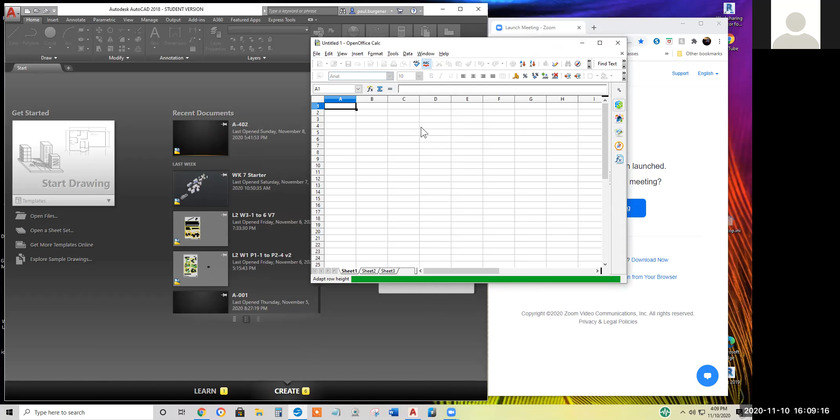I can't understand what you're asking. Can you hear me? Yes, I can hear you. I don't have the complete final project.

Can I send you the birdhouse during this week? Something about this week. I don't know if you're too close to your microphone, maybe.

Okay, I didn't assign anything week 7 or 8. Is there a way you can text me? I'm at a loss on why I can hear you, but it's kind of garbled.

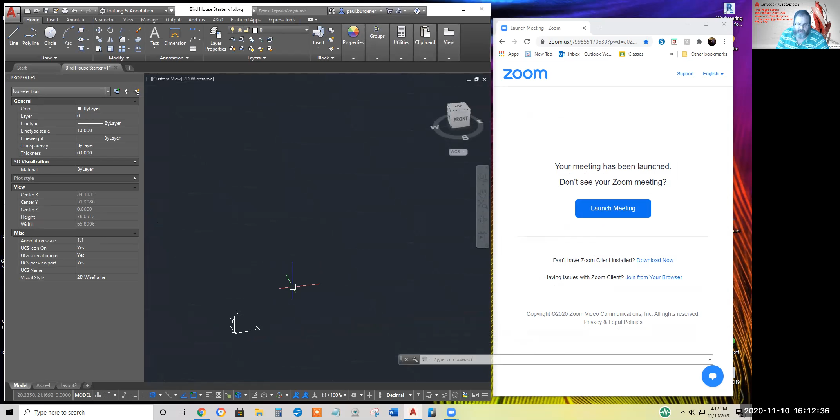Monday the certificates will go out, so you got until like Saturday midnight to get me the birdhouse.

Let's see, where's the birdhouse rules? Where am I? Oh, okay, here's the birdhouse rules. I added note number 2 for the next time I use this in intermediate.

It's tempting to have a V notch in the top instead of a nice tight seam in the top. But that's a funnel for water to collect and drip into the birdhouse. So I'd like you to seal it either this way or overlapping.

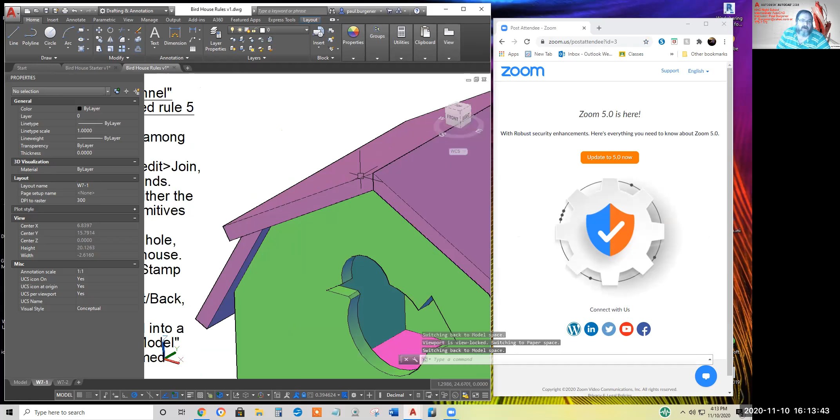And I suppose this board could extend all the way out to here, and that would fit the bill. That would provide a glued tight seal that water couldn't penetrate. But the rest, the other 15 rules, still apply to this class.

Let me double check I'm recording. I see a stop video. AutoCAD class 2020, Zoom recording. And today is the 10th, so this folder... never noticed meeting saved chat before. Anyway, it looks like it started recording at 4:08.

Ah, thank you. Okay, I didn't realize there was a text file here. How do I reply? Yes. I don't know if she got that text or not. I don't see a reply button.

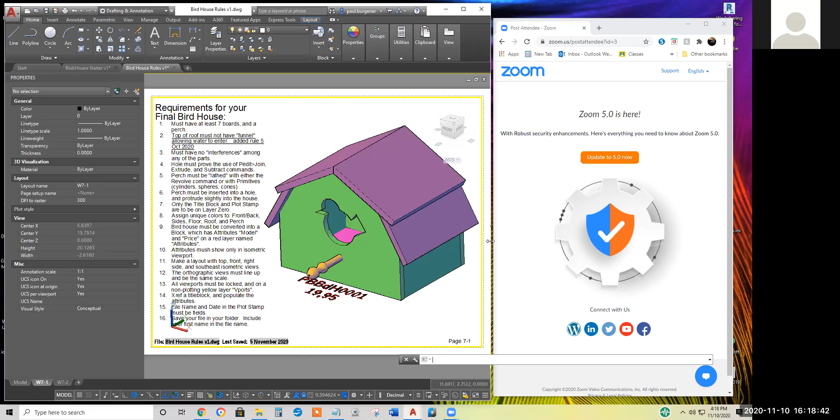And so the one that comes up on my version of AutoCAD has circles as one of the options, text inside of a circle. They have the text inside of a hexagon too, but so I took the circle one and copied that block and modified it to have an oval, and it worked pretty good.

And I added the attributes like you taught us, because I wanted to also say in front of that oval in the text, reference 15, and then it's really piece number umpty-ump in the oval. So it worked out great.

I learned something in this class.

Well, what about the leaders? Were they attached to the block, or did you make a separate block of the leaders that you could attach and stretch, scale anywhere? Go ahead, understand the leader part of the functionality in the tool palette there. They had the original one and I just modified it. I'm not sure how to attach the leaders to a block, but they already had it. Like I said, I just modified the existing one. Does that make sense?

Sort of. I don't know how they attached the leader, but the leader was part of the entity that I had copied and modified. When you modified the circular block, could you remove the leader or put it on the other side and save it to a new name? Or I tried to do the block separately. I tried to just make my own block, but then I didn't have the leader. So then I said, well right, I have that leader, and so I just modified what was existing.

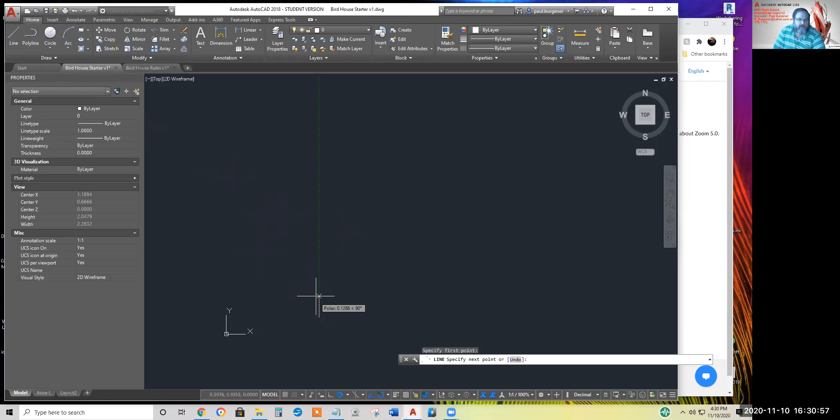Anyway, how fancy should I make the front? Damien, I think, had the walls taper out. So does that look like a good half of the front if I mirror that over? Yeah, kind of a pentagon-ish looking thing. So there, we'll call that the front.

We'll put the fancy cutout. What would be a cute cutout? Maybe a heart. Let's see, arc. MI for mirror. What happened? Oh, I'm still in arc. MI for mirror.

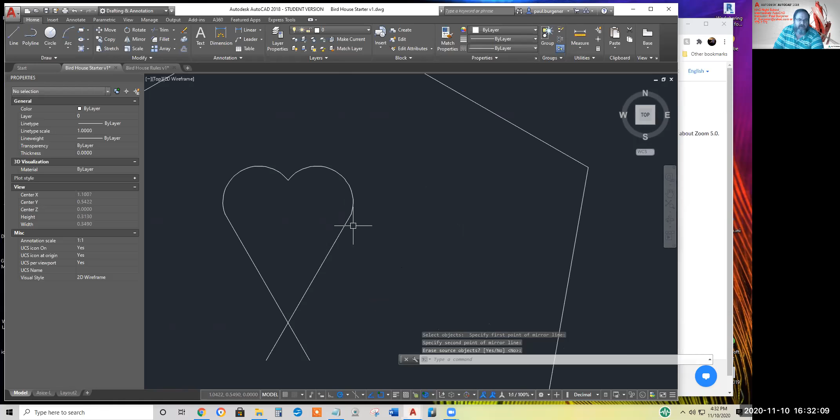MI for mirror again. A little bit of a jag there, but don't tell anybody. And TR for trim.

Is that too big? Maybe scale it down so the squirrels can't reach through. Scale it maybe to 3/4. Better center it while I'm thinking of it.

M for move. And eventually we want a hole for a perch, so maybe I'll use NEA or snap to put the perch maybe right there, and we'll make it say, let's see, radius, maybe make it a diameter. Yeah, what the heck, a diameter of say 0.5 unit.

Hello. What happened? Oh, I'm an idiot. I forgot, I should have been typing dimensions.

How big do we want this bottom to be here? Say 10 inches, 8 inches. Let's make it say 8 inches.

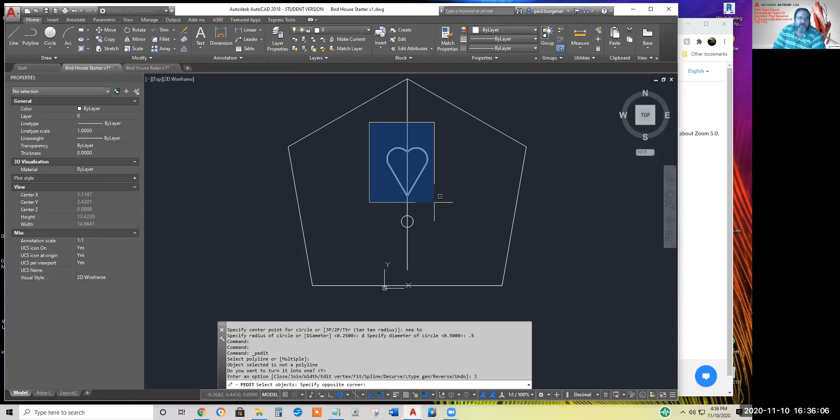And we'll select the rest of the heart. And I believe that's, yep, that's successfully welded into a closed polyline.

Do the same process for the perimeter of the front. We'll change that line. Yes, I want to convert it into one. Join, select everything. Up. Why is it not closed?

All right, I just clicked close and it's unusual. I thought I snapped end to end to end. Let's check out the width, see if anything strange happened. Oh, that's what happened. It came up here to the T intersection and went down and back up the vertical line. Always something. All right, we will hit escape or enter.

We'll explode this odd polyline and select and hit E for erase. Don't forget AutoCAD, you can select stuff and then invoke the modify command. It's probably better to invoke the command and then select the objects, but we'll erase the vertical line.

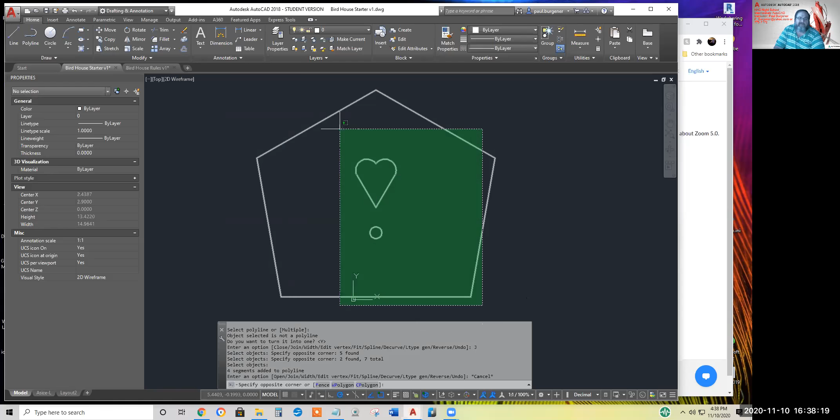Okay, we'll put everything. Who's coming aboard now? Anna's joining us. Okay.

I can always do it another time, but while I'm thinking of it, I'll move everything we got here to the front, or the front back layer, so it'll be green colored.

I believe I can extrude all 1, 2, 3 of these closed polylines, well, the circle and 2 closed polylines at the same time. I've been using 1/2 inch plywood, but there's not a requirement for thickness of the board. So let's go switch over to the 3D modeling workspace, launch the extrude command.

We'll select everything we got here and extrude it to, say, 0.5. Now, unfortunately, I didn't set the layer current, so I'll have to fix that. Enter.

Because I was on the 0 layer when I extruded, the new stuff is on the 0 layer. So, always something, ain't it?

We'll move it to the front back layer. And where's the layers? I'll set current.

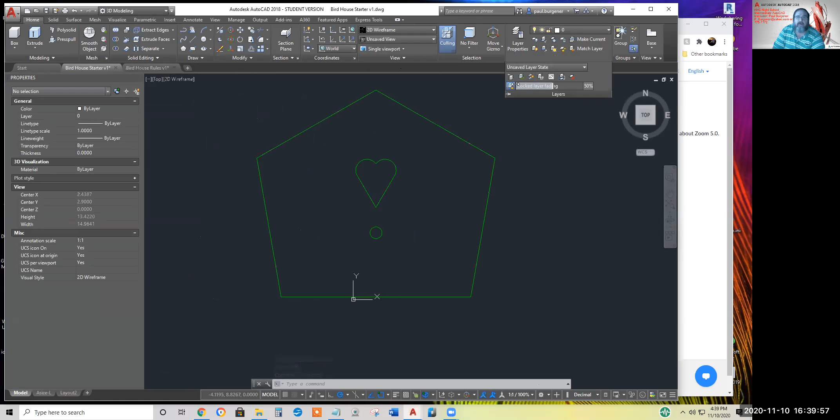Okay, so much of the zoom controls blocking my screen here. There we go. Make current. We'll click the make current icon and whoop, didn't quite click it. Make current. I'll select something that's already on the front back layer.

So the front back is current, and everything so far is on the front back layer. I believe I've succeeded in extruding. Let's go to a 3D free orbit.

Yep, so far so good. Let's subtract from... oh wait, before we do that, I'm going to copy this guy so I can use him for the back.

So we'll go to copy. Nope, where is that? There we go, copy. And I'll set them beside here.

Subtract. I want to subtract the doorway, the heart-shaped doorway, and the hole to insert the perch later. So I'll click the subtract, lunar eclipse looking icon.

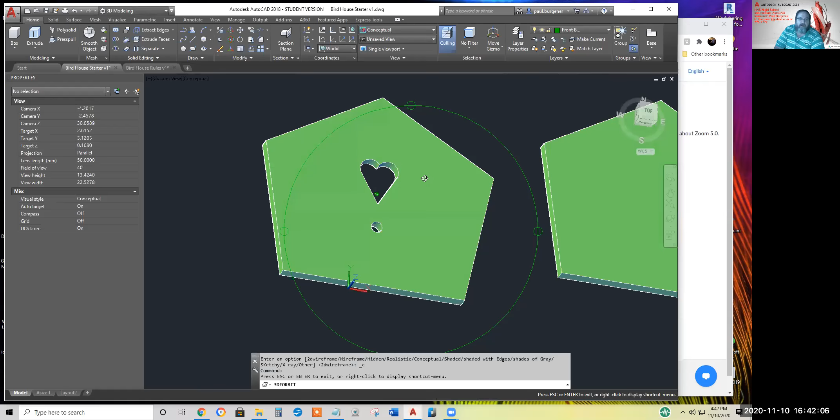Next would be the region's stuff to take away, the small stuff. So I'll take that away. We'll do a visual rendering and 3D free orbit. So far, so good.

All right, now I'll rotate 3D these two pieces upright, and from then on, the front of the birdhouse will be what AutoCAD calls the front view. Right now we're in what AutoCAD calls the top view. Now, I think I've seen some students successfully put the front, top, and right side views, but because everything was still on the XY plane, they had to specify that top view in place, located where the contract says put the front view.

Anyway, let me get a better shot at stuff here. Okay, we'll go to 3D rotate, or rotate 3D. I'm slowly getting used to this wedding ring, newer icon. Select both items, hit enter.

We'll say we want it to pivot there. I want this red wedding ring to be the axis of rotation, and from what I've seen, it always swings toward you. Type 90. There it came up. Now, how far do we want?

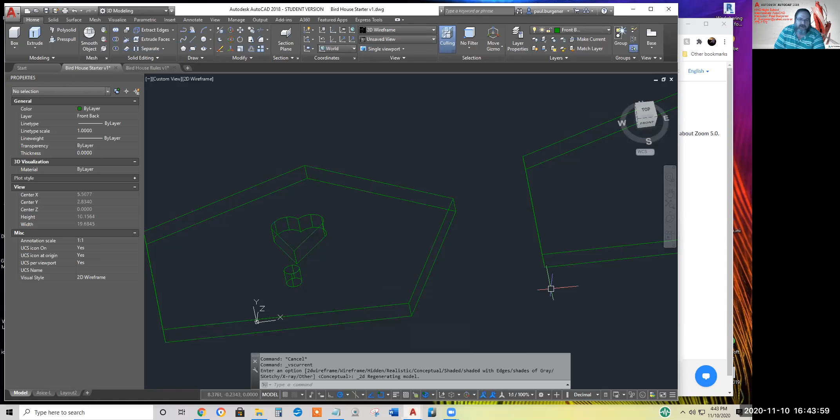Let's go back to the wireframe. How big of a dimension do we want front to back? 8 inches between the front and back boards. Sounds good. All right, we'll move.

Right on top of the other, and then we'll move, enter P for previously selected, enter. I got polar tracking on. I should have checked my O snaps and angle. Yep, good. Where was I?

I think I'm going to have to move it 8.5 inches to get the carpentry dimension 8 inches inside. 8.5, enter.

Okay, while we're still on the XY plane, let me draw the polyline for the floor. We'll make current the floor icon. Launch the rectangle command and O snap from there to there.

Now we want - I liked your idea, Damien, of making the floor a bit oversized and radiusing or rounding the corners, although that does leave a ledge for water to collect. But let's proceed. Let's offset.

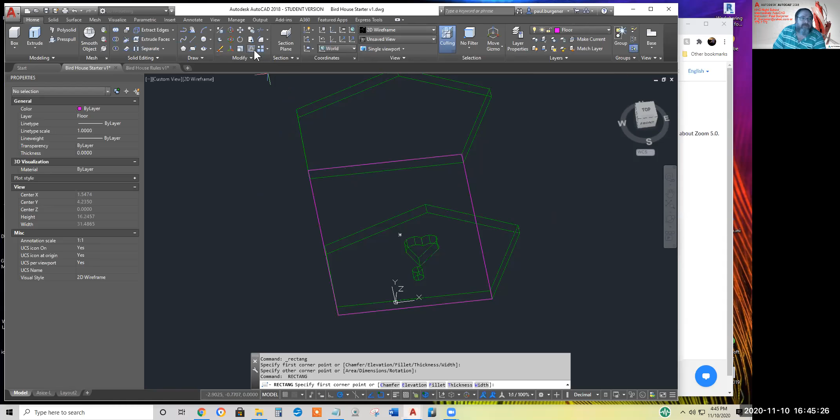What offset do we want? 3/4, say 0.75, enter. Click out. No longer got a use for this guy, so we'll erase, E for erase, or click the erase icon. We'll fillet these, say 3/4 inch radius.

Oh, wait a minute. I'm going to put the... rats. Okay, once I get the sides on, the ledge is going to be less on the sides than it is the front and back. Always something.

Isn't that a poor design? It's going to rot out because the water is going to stay on that edge. Yeah. Tell you what, later let's radius so it's a curved edge. How about that?

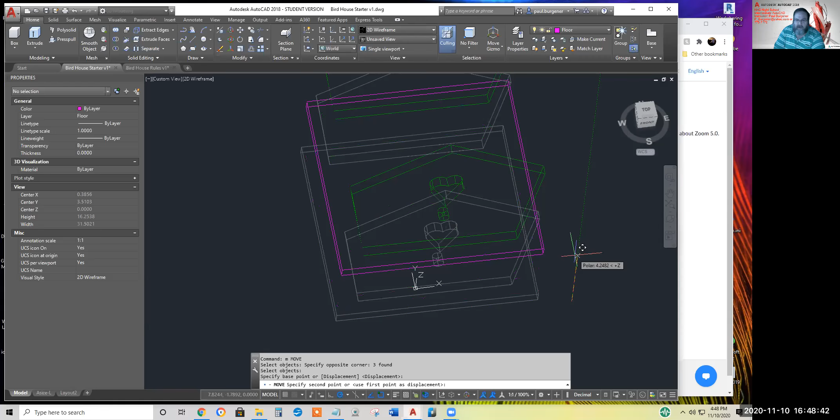Yep, the bottom is at -0.5. Just for anal retentiveness, I'm going to lift everything straight up a half an inch so the bottom of the birdhouse sits perfectly on the XY plane. Being careful, I'm climbing up the Z axis, so use the second point of the move command to be 0.5 and hit enter.

Okay, let's get a clear shot and start on the sides. I'll put a UCS on the sloped edge of the wall here. Maybe while I'm thinking, I'll change to the sides layer. Where's the UCS? UCS 3, I found very universal. So I'll click the 3-point UCS.

I want my new 0,0,0 to be right there. I want the X to be that way, and someplace up the side here will be a point on the XY plane. That's kind of the intuitive point, but it could be anywhere. There's my XY plane.

We're good to go. Let's draw another rectangle. Now, oh, excuse me, Paul, this is Dan.

Could you do 3D orbits so we can see the orientation of how that axis is laying on which planes, please? Thank you. All right.

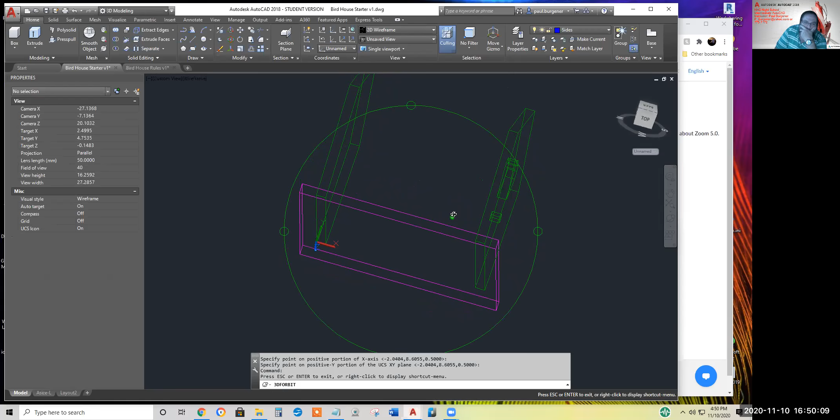Go more towards the face of it, like where the heart is. I'm kind of looking, I want to see towards the heart. Yeah. Okay. Yep, I see it now.

Yep, gotcha. Thank you. It just occurred to me, I was planning to put the board, the sides, glue it to this edge here. Would that sell well in a gift shop, having a seam of the side and the front? No, you gotta put that board inside so the front face is clean with no gaps.

All right, in that case my floor is a bit oversized. We'll fix that later. Go to rectangle. Make it from there to there. Nope, make it from there to there. We're going to put it inside so the front board covers the edge.

Let's see, Z is kind of sort of to the lower left, so I'll extrude it minus 0.5 in the Z direction. Minus 0.5, enter.

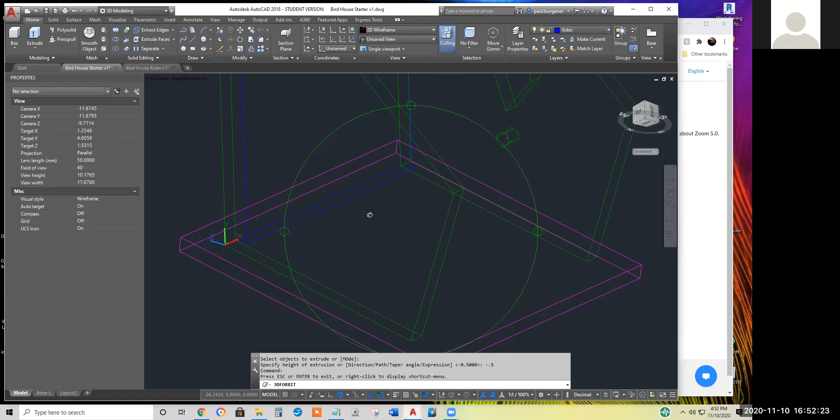Well, I'm not sure, Damien. If I use align now, that might shift the board down so I can slice off the little cheese wedge. You understand what I'm saying here? I'm a little hesitant to have the side touch the floor on a single line rather than a surface.

Yeah, I don't. Let me do the press pull method rather than try to do the align. If I do the 3D align, then the top of the side will get off.

Actually, I should have offset this guy, shouldn't I? Tell you what, let's undo, and go back to the rectangle.

Let's see, rectangle. We'll start the same there. However, we'll pull the top up a hair so we got something to shave off. And we'll push the bottom of the rectangle down a hair, so we'll shave it off at the level of the floor.

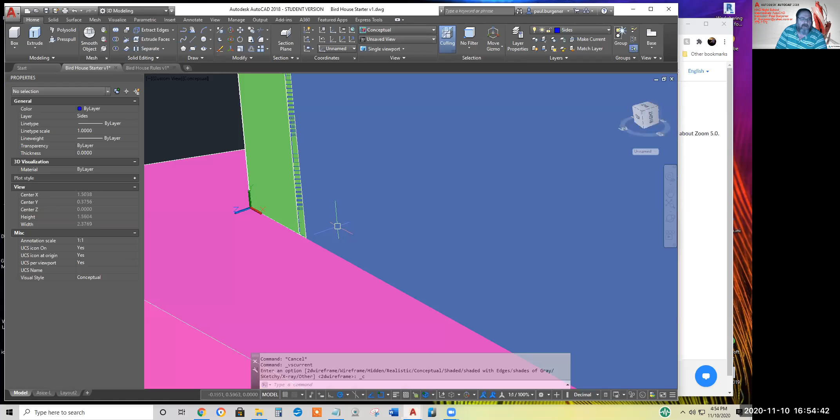Well, I don't know how it got off. Do a conceptual view. Well, that's even weirder, I've got an overlap. No. Somehow the rectangle got bumped in the negative Y direction.

Always something. Back to 3D wireframe. Now I'm taking a gamble here. If I grab this slab from a near point and move it to a perpendicular point, would that realign it? I can't remember if a near or O-snap works on a 3D solid.

There is a 3D O-snap command that I really need to play with. I got it turned on. I still don't know what a knot is.

How about the midpoint? Yeah, that's a thought. I don't see near. Nope, there's nearest. Nearest to face. Let's go to midpoint on edge, and we'll perpendicular it.

It was the first time I played with 3D O-snaps. I don't even know when they came around. Where was I? Move, select that guy. O-snap on the midpoint. All right, the perpendicular O-snap didn't come up. That sucks. Oh, shit.

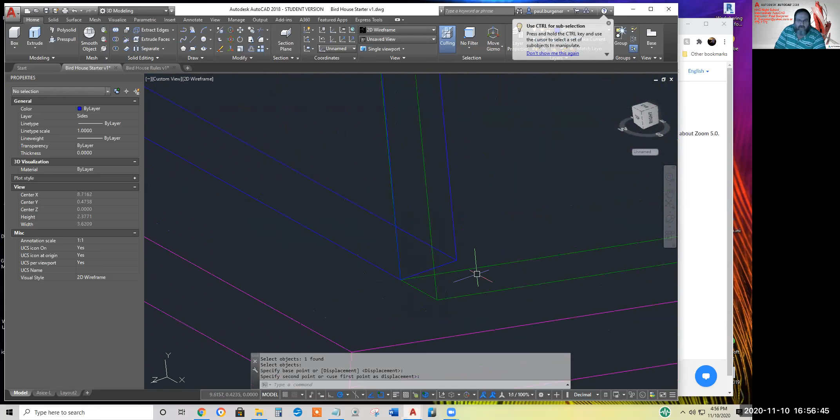All right, be that way. I'll move it from this corner to that corner and then move it straight down. I got enough overlap to 3D slice.

Something is very strange here. Looks like my UCS is off. Notice how the blue board kind of tapers. Let's do a conceptual wire, and spin it around, and it looks like somehow the board got a gap there.

Always, always, always something. All right, we'll blip the side away and start a third time. Go back to wireframe, rectangle, from that corner to that corner. Zoom in, no surprises.

I'll stretch this. Oh, I'll bet this is how it messed up. No. Y is on the edge, so if I follow the Y direction, maybe I accidentally went up the Z direction. No, Z's totally different.

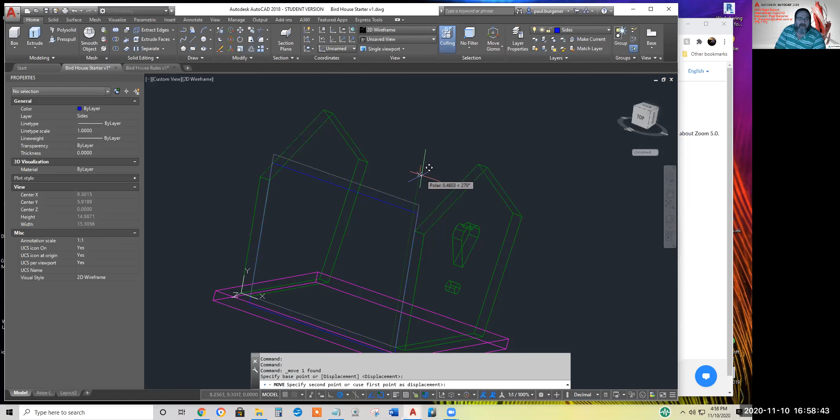We'll say we'll make it there, and then we'll move this guy straight down the negative Y direction. Zoom in to make sure there's no surprises. And again, I'll slice both top and bottom.

Where was I? Extrude, click, enter, negative 0.5, enter. Okay, we'll slice off the top with the slice command. I should be saving it now. Do that next. Slice, enter. Yep, my bad. Slice, select what I want to slice, enter.

3 points, very universal. Specify 3 points on corners of the side of the house. So there's a little scrap I got. Erase. The same thing is similar down here at the bottom.

Slice, select the blue side, enter, 3 points, enter, and click 3 points on the floor that are not in a straight line. Enter. And there's the scrap for that. I'll erase.

There. Now let's, we're still in, no, let's go back to the world coordinate system. And again, you can save coordinate systems, but I think they're fast enough to make. I think everything is looking good.

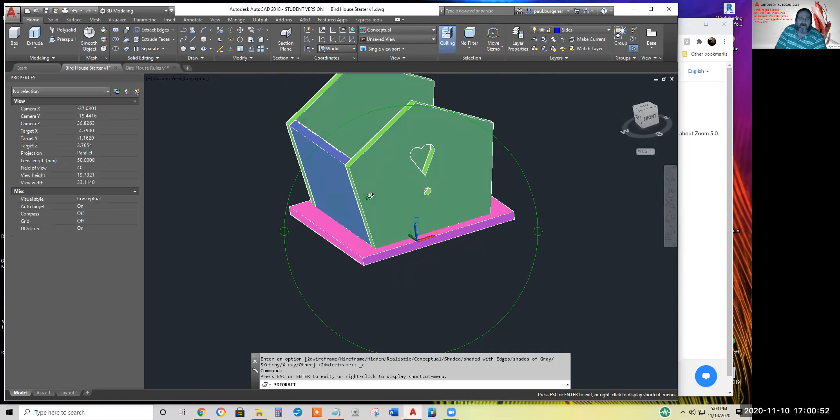All right, now we can mirror this side about the center line of the floor. Now how about a dado or a rabbet on the sides here? We want our birdhouse to be strong, don't we? I'm just playing. Yeah, we can make it bomb proof.

Eventually I'd like to get the overhangs consistent, but I think the press pull can fix that later. I guess it does. I think the heart is going to be tough for the little bird's claws to hang onto that edge that's sloping to the point.

I think the heart should be upside down, so it'll be easier to get in and out. Well, another workaround might be to raise the hole. I think there's an offset command? Oh, you can move the hole even though it's already been subtracted? Yeah, I've done it before. I think you absolutely have to type a distance. You can't just grip edit it.

Let me try. Sorry to spend so much time here, but I believe, as I recall, I'd need to type, say, 0.75, just move to offset it up. Nope, that didn't work. Offset faces.

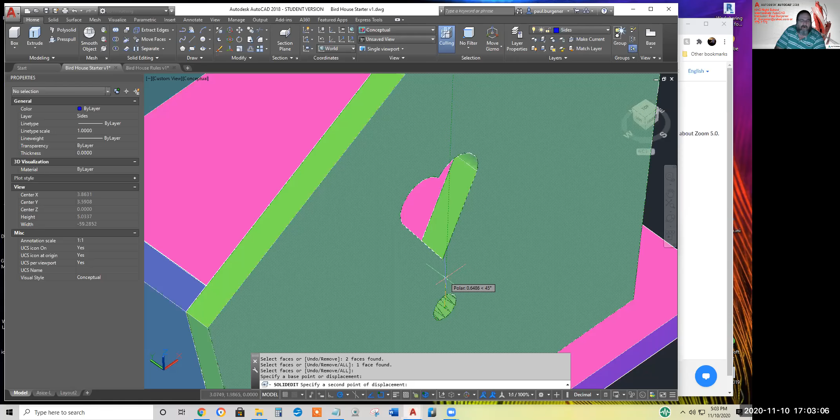I don't think it was move faces, but let me try that as well. Okay, one face found, enter. Going up the, actually, am I in the world coordinate system? I've already forgotten. Yeah, okay, I'm in the, well, to double check. World coordinate system, move faces.

Let's see, select the face. 2 faces found. Hold the shift button and unselect. 3/4 up. I typed point 75, 0.75 in the Z direction. There we go.

And we could put a flat spot on the bottom of the heart. That's a thought. Maybe I'll put a little wedge in the bottom of the heart. Yeah, what the heck. Let's go to UCS again.

3. Click. Click, click. What happened? Three, enter. New origin there. New X, new Y. Damn it. I'm hitting space bar when I should be hitting enter. Oh no, it's working there.

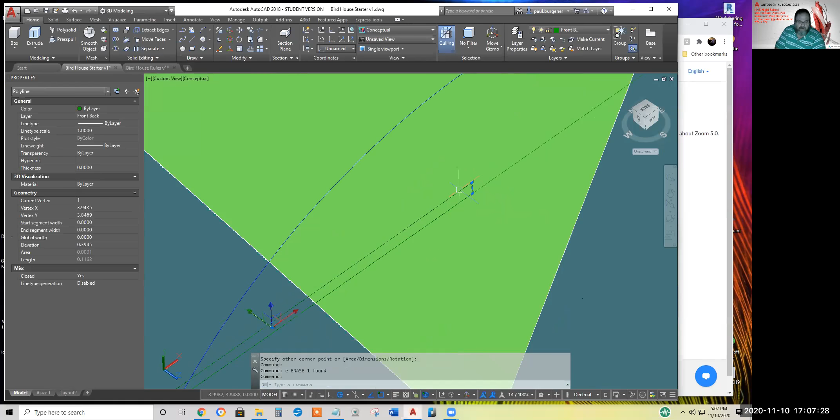I hit cancel too soon. Rectangle, click. I think the O-snaps are biting me. I'll turn off the O-snaps.

Hope I can do this in 2 hours. Up, END to get there, click there, and nothing will go wrong. Extrude, and let's see. I want to go in the negative Z direction, say 12 inches is plenty good.

What happened? I think my automatic save bit me. Let me save this before I regret it. Student work, week 9, Paul. We'll name it Paul Bird House.

And we'll leave it version 1, just in case I need to—what the hell, let's erase and name it Paul Final. Click save. Now there's the, doesn't look very thick, does it?

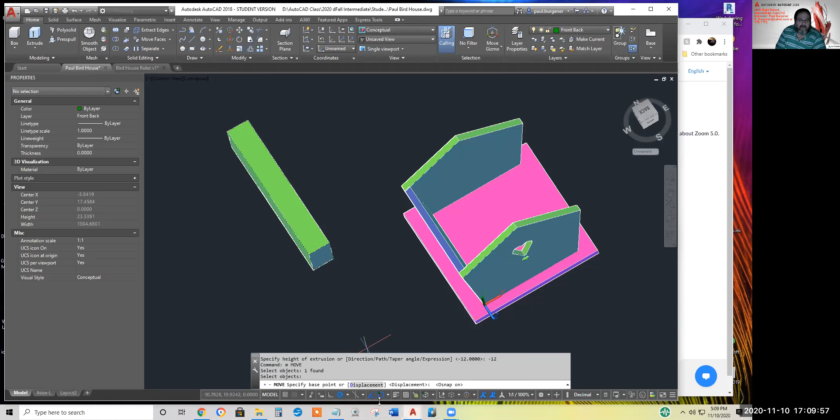Extrude it, -12, enter. Move this guy, turn back on the O snaps. Grab him by the midpoint. I think I can O snap him to the bottom of this V. For good measure, I'll move him down a hair, being careful to move in the negative Y direction.

Oh rats, I'm going to have to slice this a couple of times. That solid is way too big, isn't it? All right, press pull.

I'll type NONE for none O snap. Okay, union. That and that, enter. Okay yeah, this will work.

I'll just slice it once. Didn't have to go all the way through after all. I don't know what I was thinking.

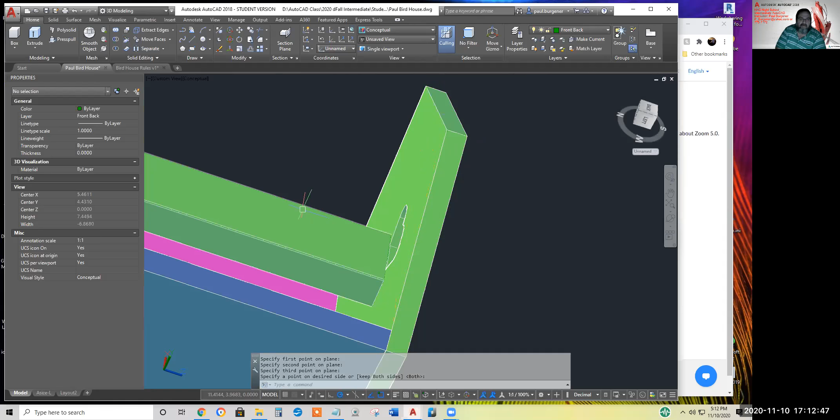Click, click, click, enter. U for undo. Slice, select, enter, 3 points. Click, 2, 3, enter. Blip away. There.

Why does that say... oh, do I have a... okay, this is not the world coordinate system. How did that happen? Top, front.

Okay, it's a bit of a wider perch than I thought. Can I pull it down? Press pull. U for undo. Press pull. That was cool.

Okay, this... I was hoping it would follow the tapered sides. I like the keyway, it looked like a keyway. It was pretty neat.

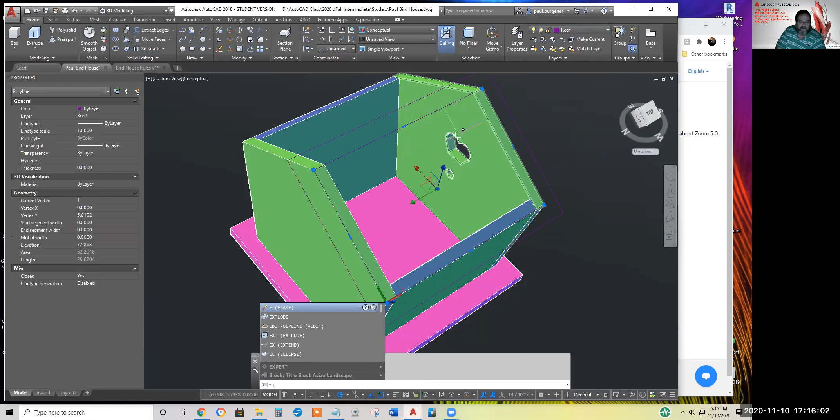Okay, we'll offset it, right now it's set for 3/4. Is that good? Yeah. Select offset. Might as well get rid of the original before I forget about it. We'll extrude this larger rectangle positive 0.5.

Let's go to a wireframe view. And I need to slice it straight down onto the peak. I believe I need to use another UCS. Let me go back to world coordinate system. And hopefully I can, 1, 2, and straight up the Z axis for the third point of the slice.

Okay, slice, select, enter, 3, enter, click, click. Okay, that is creeping somewhere on the XY plane. There's the Z, enter. There we go. Let's get the warm and fuzzy.

I believe that's a winner. In the XY, or in the world coordinate system, I can mirror this roof slab straight over with the 2D mirror command.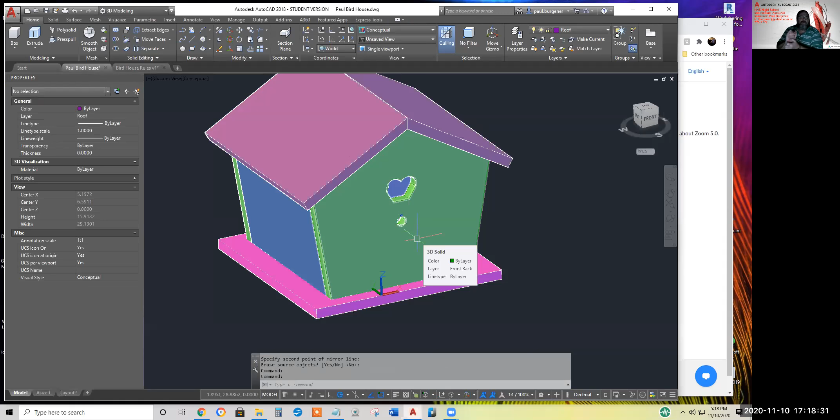That's a gambrel roof you had on that other birdhouse. Gambrel? If you say so. Gambrel. Okay.

5 minutes, I'm gonna forget that. All right, let's make a perch. How big is this again? 1/2-inch diameter. What the heck is that doing there? Let's erase that.

I'll set another UCS on this surface so I don't have to 3D rotate the perch. I can draw this circle, maybe put some spheres in it. Usually I make it with a polyline and then spline the polyline, but the instructions say I can use primitives as well.

3D UCS there, there, and there. Double check. We'll start with a circle, making current the perch layer. We'll extrude a circle whose diameter is 0.5 to go into the 0.5 hole.

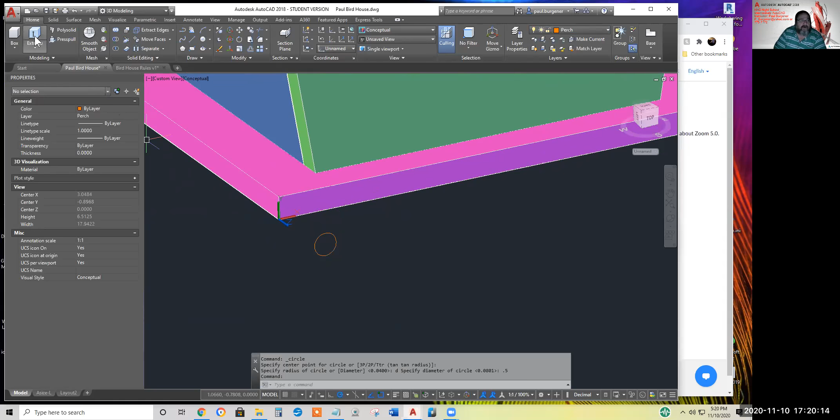Yes, I know you got to have a slight gap, but don't tell anybody. We'll extrude this guy, bring him out some distance. Sometimes I miss this dynamic input because then I can see right on the cursor how far I'm going. I've tried dynamic input and didn't really see the beauty of it, but I will give credit, I can see how far I'm working here. Let's make it say 4-ish inches.

We'll get some spheres for primitives, and I'll move the sphere, and I'll copy the sphere. How's that? I believe it fits the bill, but kind of simple.

All right, we'll union the 3 pieces together so they ride in an assembly, and we'll move the perch so it is barely touching the surface of the front of the birdhouse. Bail out of the move command, go back to 3D. So you can see the perch is at the entrance of the hole.

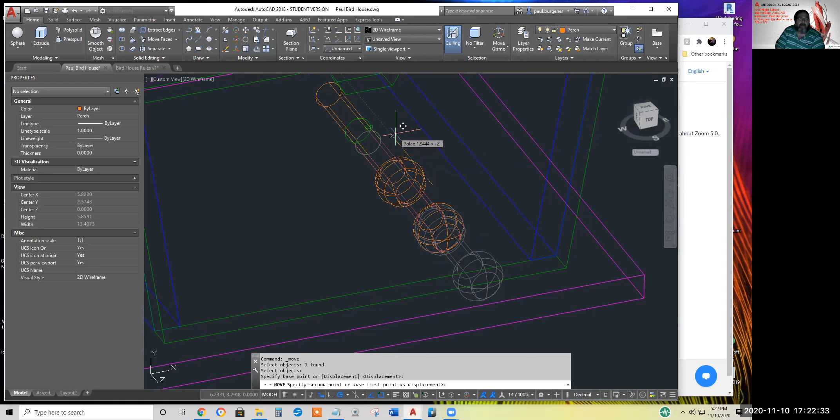We'll move the perch in the Z direction so it protrudes a little bit. Usually I just put it a 1/4 inch, but I kind of like that intermittent step for the bird to hop up on to get to the opening. I still got the attributes, and I still want to chamfer or radius the floor.

All right, this is 3/4, right? DI for distance. There, PER for perpendicular. Yes, that's 3/4 for the distance. So let's force the sides to be exactly 3/4. 0.75, enter. Get a second point here. 0.75, enter. Now I can slice this end with these 2 points and up the z-axis.

Slice, select the slab, enter, 3 points. 1, 2, and straight up the Z, enter, take that guy off. I'll mirror those 2 guidelines about the center of the floor.

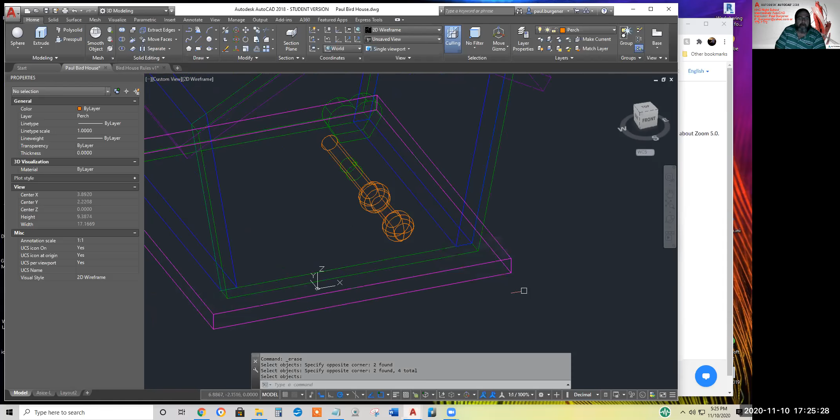I'll lose these guys before I forget. Now, can I fillet this? Okay, the board is only a 1/2 inch thick, so let me fillet it. We still have a slight dust collector, don't tell anybody. Let's see, modify, where's the fillet command?

No, that's trim. There's fillet. We'll set the radius. Let's try 3/4, I'm not sure what'll happen. We'll set the radius to 0.75, enter.

Select an edge. You like that? No more dust collector. These things just might poke a kid in the eye, but we'll put in the user manual: place at least 8 feet off the ground so kids can't run and poke their eye out there.

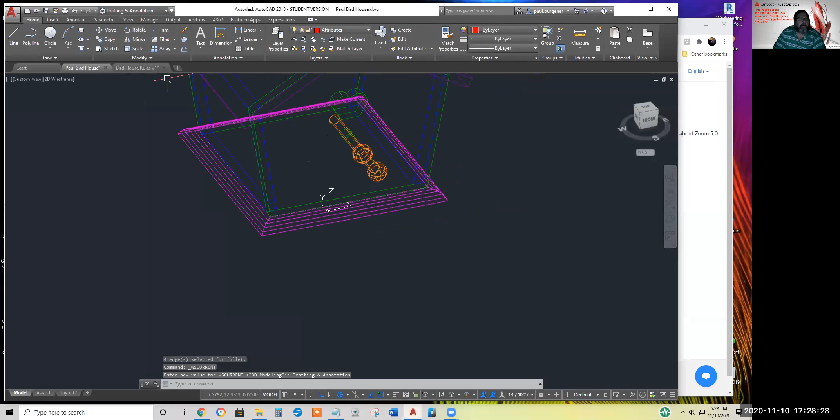Let's go back, I don't think I can get to create an attribute from this workspace. So let's go back to 2D drafting and annotation to get to the attribute panel. It's on the insert. Define attribute.

Let me double check ID. I think I'm still on the XY plane, aren't I? Yep, Z equals 0. Define attribute. We'll leave everything, we'll call, what was this? Model number and price, I think, are the two requirements.

Regardless of whether I type in caps or not, it'll change to caps. Can't use a blank space in the tag. Not sure if, I think you can. Yeah, you can use a blank space in the prompt or the default.

Model NO. What's the model number? Question mark. Maybe give an example: AABB dash 1234. I figured AA is the manufacturer, so I put PB on the handout. And BB was the word for the object, so I put BRB or BRH for birdhouse.

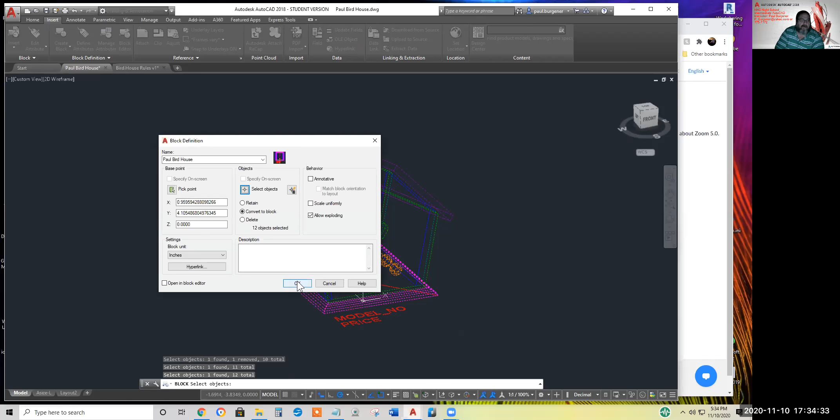Up pops the two prompts. I'll say PB for the Paul Burgener Manufacturing Company. Say BRD, BR, or BDH for Birdhouse.

Hyphen, and we'll call it 000001. You know, a lot of the operators will forget to put the cost down, so maybe if the data is ever extracted, we'll do a search and replace the 11.11 with zeros. It could probably be written into an Excel macro.

We'll call it, say, $29.95. Click OK. And I believe we got a winner.

Go to the layout now, make current, let me save my file. Well, I gotta repopulate all these attributes. Oh, and I gotta do the plot stamp.

Some of you, I think, got a title block with the plot stamp already made. Not sure how that happened. Where was I? Home, layers. Want to make current the vports layer.

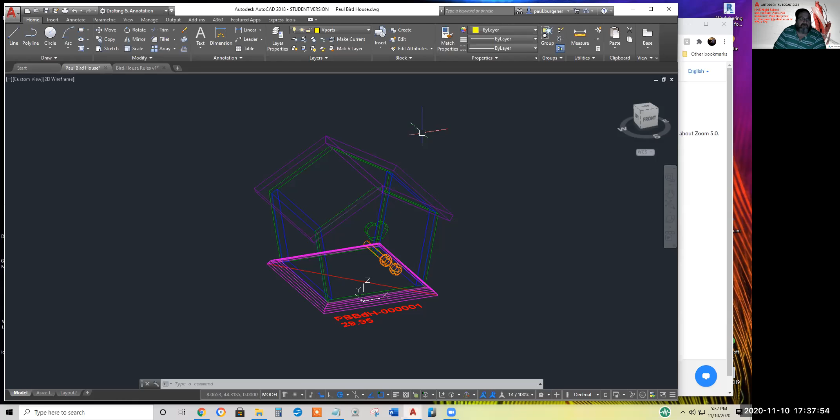I'll revert to the type-in commands, MV or vports. I want a single, oh, what the heck, let's make 4 equal. And I'll say they go from just inside the border to just inside the border over here.

Yuck. I guess this big guy, how did he come out there? We'll set this one to a southeast isometric. This one to top. This one to front. This one to right side.

I'll select all three, hit double, get into paper space. I'll select these three viewports. Accidentally selected the title block, but that's okay. Properties will isolate it down to just the three viewports.

And what would be a good scale? It looks like a quarter won't show the entire perch. How about a fifth? There we go, that looks good. 1 to 5.

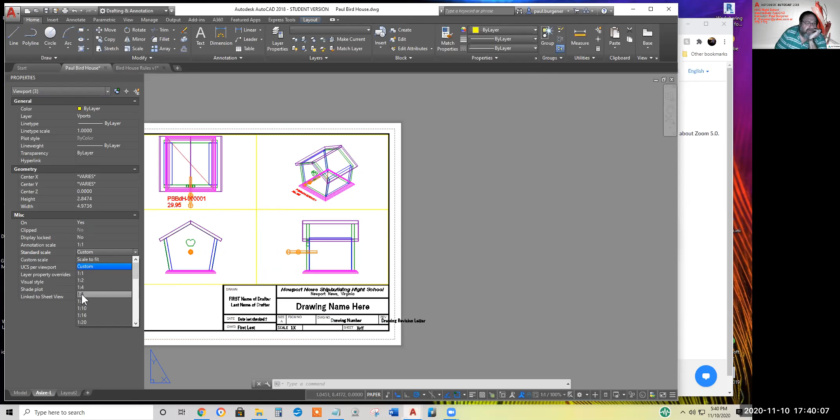Or we could go to the American architectural scales. Yeah, let's stay with 1 to 5. Okay, we got to line these up.

I'll stay on the viewports layer and launch a line command. We'll O-snap right there, bring a guideline straight across. We'll go right on the peak of the roof and straight up. Now, if they lined up, it's surprising.

Usually I make viewports, you know, maybe by creating the 4 viewports, they automatically line up, maybe. Let's see. But they definitely do appear to be lined up already. I got them the same scale. I better lock them before I mess them up.

Let's see, viewports, display lock, yes. All have the 0.20 custom scale. All right, this one I think we want conceptual. Let me go to the handout. What did I do here?

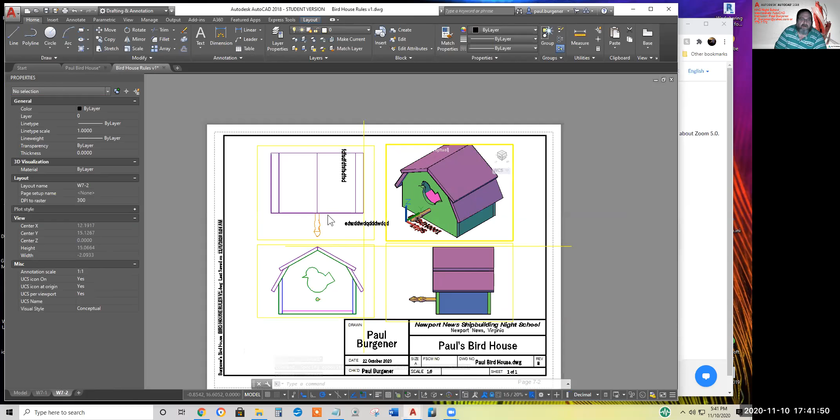All right, that's conceptual, isn't it? Yeah, these two are conceptual and these two are hidden. This one I think I made with a zigzaggy polyline and p-edit splined it, to give it that caricature.

Anyway, where was I? Paul Birdhouse. Invoke or activate this viewport, conceptual. I don't know, I'm going to experiment here. I think I can select them both and change the visual style of them both. Ah, it's locked, we'll unlock. Interesting, no, I can't change the visual style. All right, we'll do it the old way.

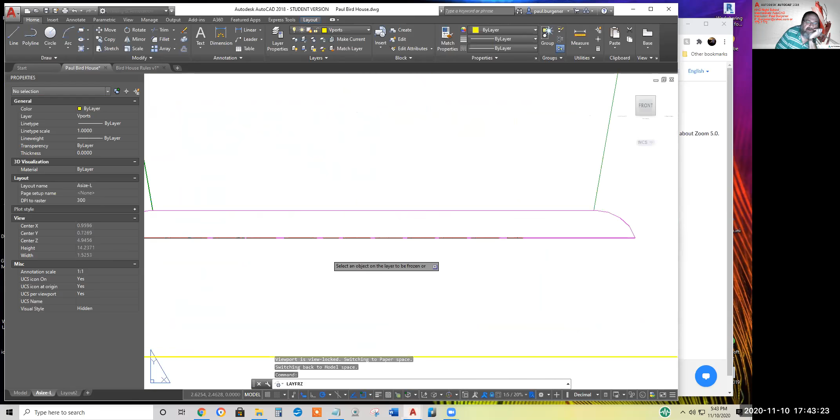Does the handout show the attributes? Okay, the attributes are shown only in the isometric. I don't think this is a requirement, but I'll freeze the attribute layer in the 3 orthographic views. Freeze, click. This one might be a little difficult to grab. Freeze.

Now what happened? Okay, the entire birdhouse. I froze the layer that I had put the birdhouse on, not the layer of the attributes. Not a problem. We'll go to the viewport layer, move the zoom stuff out of the way. And attributes, we want the VP current. Nope.

New viewport. There it is, VP freeze. I want the attributes frozen in this viewport. Activate this guy and do the same. Ah!

I think what happens is I kept current the attribute layer when I made the block. Always something. All right, we'll just remake the block then. I'll set current, say the, I don't think there's a requirement. I'll set the front current.

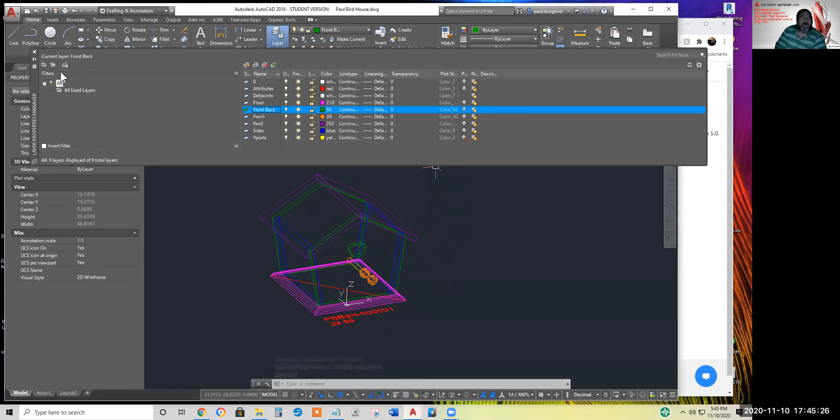We'll explode this. I'm going to have to retype the attribute values. Okay, everything, the block will be living on the front back layer. The individual layers of the sides, front, back will control the color of the respective pieces.

PB, what I say, BD capital H hyphen 000001, 29.95. Click OK. If the wind's blowing right, yeah, the attribute layer is frozen in these viewports.

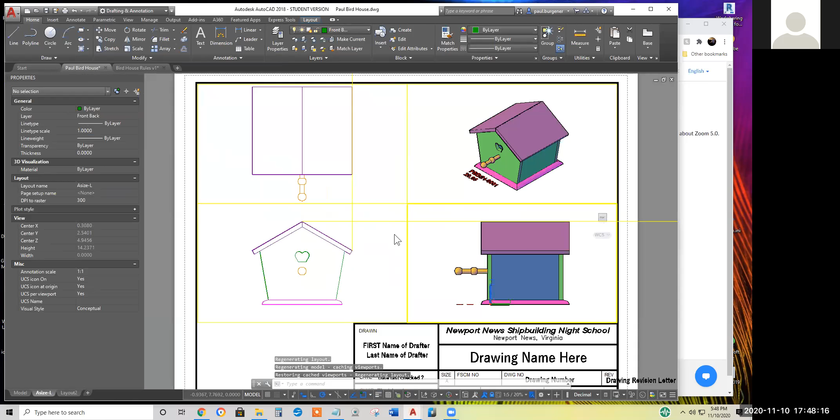Now, this is based on if we received a start model from you, or is this based on us making the layers ourselves? I'm expecting you to use the starter file. Okay, I think I started with starter file and then I saved it as Paul Birdhouse. All right, yep, so thank you. I'll email it if you don't have it. I just started working off of an existing one because I haven't had time to upload it to the system. So I'll get there, thank you.

Not a problem. I guess I'll have to go to the layer property managers and freeze the attributes layer in this viewport.

What else? The isometric could be bigger. There's a lot of white space between these two views, so let me move these two viewports a hair to the right. And these two a hair to the left. Does that white space look about the same?

Maybe a hair further. We'll unlock this guy and, it's not locked after all. How did that happen? Oh, I locked the 3 to get them the same scale. I didn't touch the isometric.

We'll double click in there, type Z, enter, enter, and that brings up this real-time zoom. So you can slowly creep in and enlarge the view. Hit enter to get out.

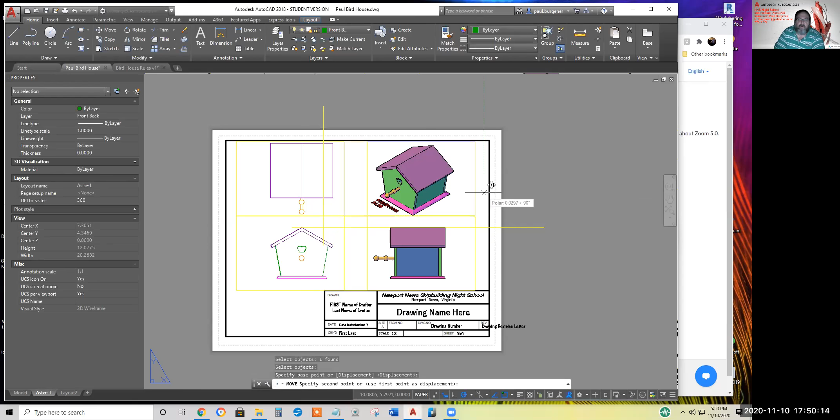We'll get back into paper space and move, M for move, the viewport a hair up. You can barely see the corner there. I guess it's good housekeeping to not have viewports overlapping.

But it's not in the contract, so. And it might be good housekeeping to bring the viewports in closer.

Still got to populate the title block. Okay, drafter first name, Paul, apply, last name, sloppy with the capitals, Burgener, apply, date checked.

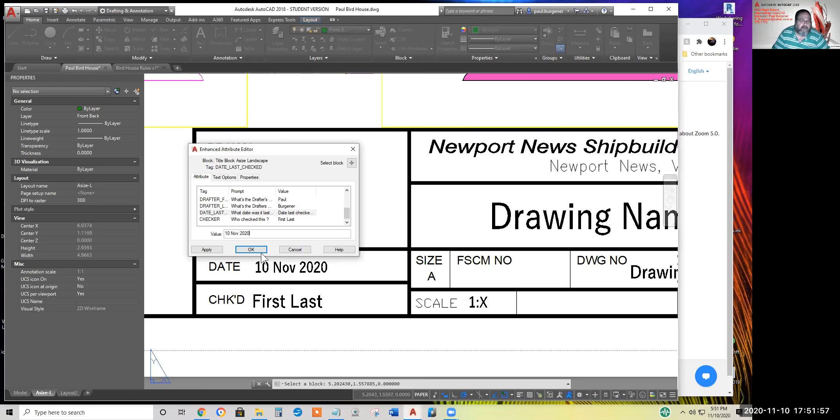Let's put down today, and pardon the military, but actually the military just types the year with 2 digits. Now, didn't we learn anything from Y2K? Spend the extra file space and time, type 4 digits instead of 2. But they never ask me these things.

Apply, who checked this? I did. Maybe I'll just put my own initials. Scale on the 3 orthographic views is 1 to 5.

This could be rigged as a field. Maybe I'll add that to the exercise next time. Drawing number, and it should say drawing name. We'll copy exactly what I saved it to.

Revision, we'll call it A. What's that say? That's the sheet number, 1 of 1. Put some spaces between. I think I got all the attributes. Nope, name a drawing. Okay, we'll call that Paul Bird house.

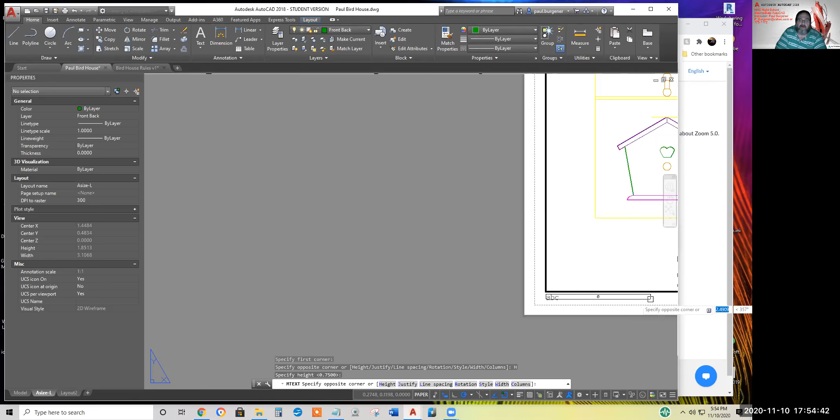Mtext. Click there, right click, height. We'll make it say that big. Make it plenty wide enough. What are the requirements?

Now I'll take a guess. I'll change it to the layer. Right click, insert field. File name only. Two spaces. And insert field and date and time of last saved. Save date.

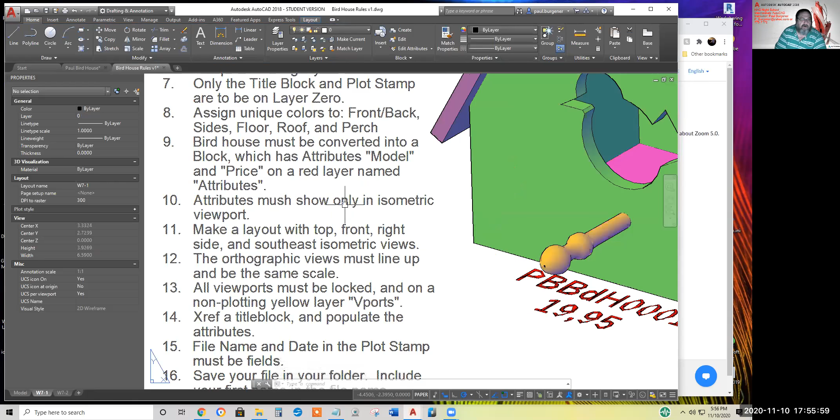Click outside, we'll move that to the 0 layer where the title block lives. And let's check the rules. Attributes must show only in isometric. Well, note to self, yeah I'll fix it right now. I think I misspelled 'only' someplace as well. Maybe I fixed that.

Xref a title block. Well, disregard that, I don't know how that remained there for so long because I gave you the title block on a layout. All viewports locked, orthogonal line up, same scale, make a layout, top, front, right, southeast. Attribute must only show. Okay, I gave you number 8 too in the template.

Only the plot stamp, title block and plot stamp are on layer 0. Where's the field required? Here we go. File name and date in the plot stamp must be in fields. All right, by date, I chose the date and time flavor. Is that a comma? How'd that happen? Period.

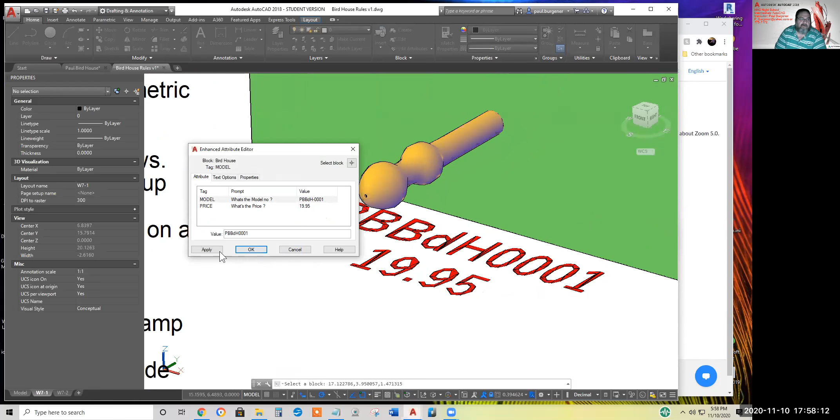And for some reason, if I put a hyphen in this, it comes out as like a vertical line. Yeah, what is that? I can't for the life of me figure out why a hyphen comes out as a vertical line. So that's why I wimped out and just took the hyphen out instead of figuring that out.

No interferences, let me double check for interference. Go back to Paul Birdhouse, go back to model. Let's see, are we on the world coordinate system? Let's check. Don't see any interferences. The sides do not penetrate the roof nor the floor.

Just occurred to me, could I put a fillet? Well, either way, I'm going to have a sharp corner. We'll just call it good enough. What the heck is that? Okay, it looks like I'm going to have to build the block again to get rid of that sacrificial there. Since I got to do it anyway, let me go ahead and make a better heart shape.

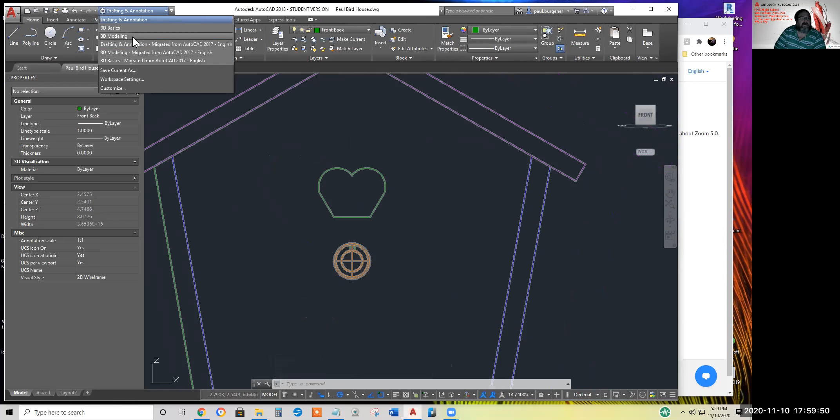We'll go to UCS view. There.

We will copy this guy. Draw a line from TAN, polar or object snap. And go over here, I could mirror it, but TAN or right click. What happened? Enter.

And we'll draw a line to give a flat foot there, trim away. That a little too big. Nah. Where am I? Trim, enter, click, click.

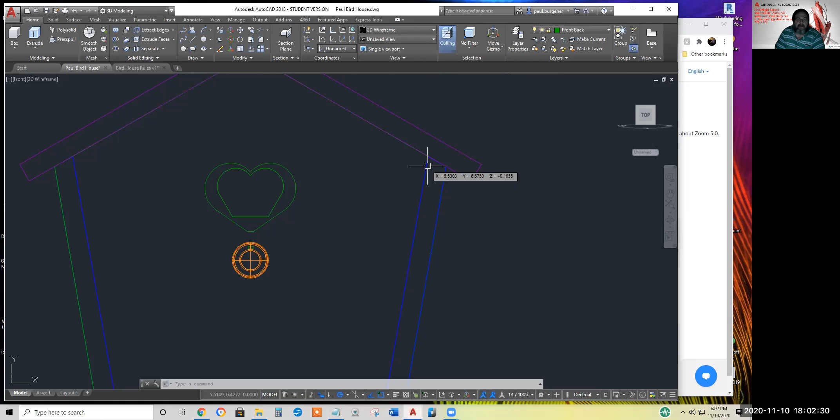Now, by sheer coincidence, I can subtract the new heart without having to fill in the old one because the new one's bigger. Now let's see where it is in space. Okay, that is at a Z of minus 5.1055. Okay, I think the heart is inside the house now.

No. Looks like it's right on the face. I don't know why I got different. Anyway, we'll subtract, we'll extrude, send it in the negative Z direction, plenty to cut through the board.

Half inch is sufficient, but years ago, how to put this, I think it was like rounding off in the 8th character, sometimes I'd get an infinitesimal thin skin. And I think it was because of the far right decimal being 9 instead of 0.

Anyway, we'll subtract. I gotta explode this guy again, don't I? Okay, where's explode?

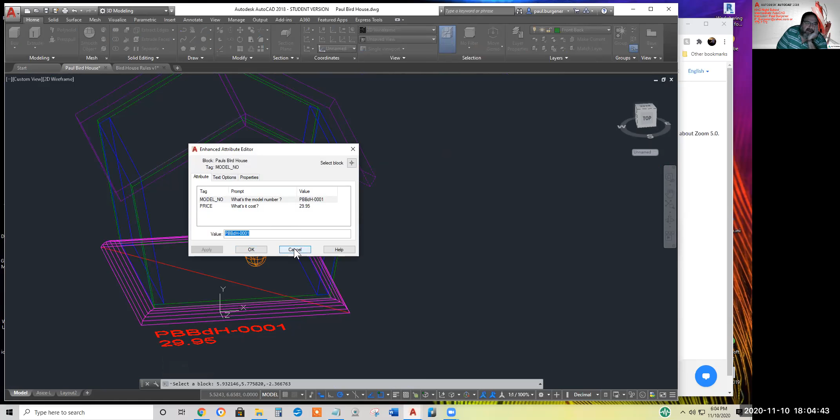Double click on it. Okay, I got attributes. Where do I go to for block editing? On 2D, I'm used to just double clicking and the block editor would open up.

You got to go to mechanical. I meant you have to go to the 2D palette and then go to your block editor through there, right? Well, here's block editor... oh, okay, I am in the 2D drafting and annotation. I forgot I thought I was still in 3D solids.

Let's try this block editor on the insert tab of the drafting and annotation workspace. Which one is it, Paul Birdhouse or Paul's Birdhouse? Interesting, they appear to be identical. How'd that happen? I guess I created one.

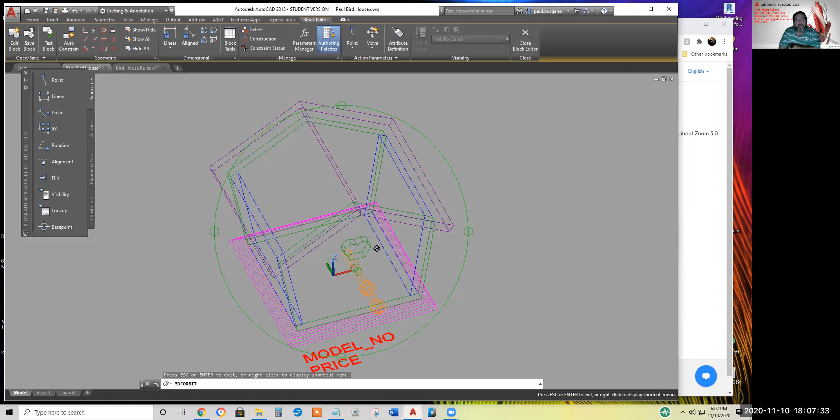All right, now how can I get the bigger opening into this? I think I'm going to have to punt, Dan, and do it my way. I never noticed that before, but it looks like you can't. You got to create something new to add to the block. You can't just come out here and select an existing object.

Not a problem. Close block editor, discard. We'll go the old-fashioned way here. Home, modify, explode.

Okay, 3D modeling, subtract, from the front plate, I want to subtract the new larger opening.

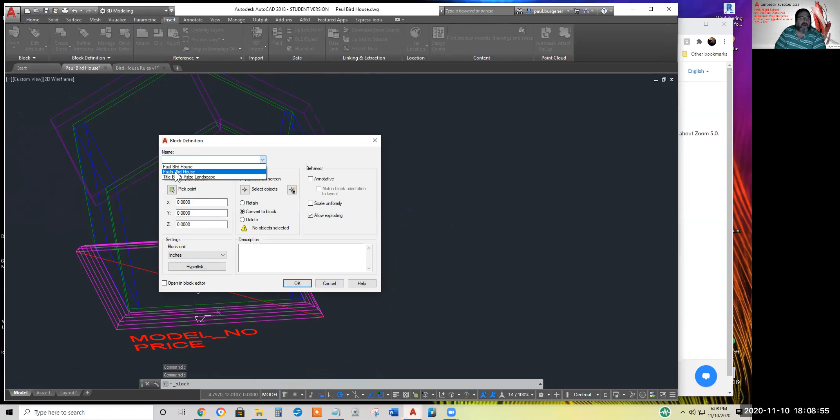We'll insert, create block on 3D modeling. I'll specify Paul's birdhouse, I'll delete Paul birdhouse. Pick point, dead center of the construction guideline, select objects, and that other side, and the attributes in order, hit enter and redefine the attribute values.

PB, BDH hyphen 0001, say, and inflation, 35.95 now. Click OK.

Go back to A size. Actually, I should have a little more white space above the viewports. Yeah, let me shrink this viewport and bring straight down the top viewport. I'm using the keyboard here, I know you hate that. Yeah, let's bring the isometric down a hair.

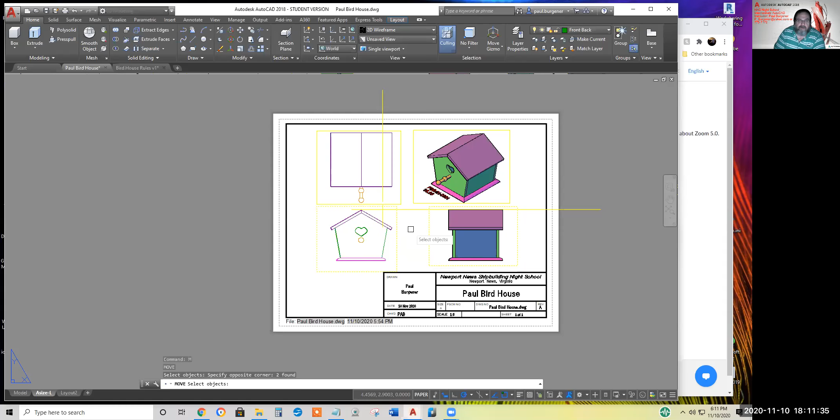Now the white space underneath this bothers me. So let's move, M for move, select these two viewports. Yeah, let's select them all. And we ought to select the guidelines already, although they're already messed up, no longer demonstrate the lining up. Does that look like a winner?

Since the guidelines don't line up anymore, let's lose them. Save. I think I am finished, at an hour and 40 minutes.

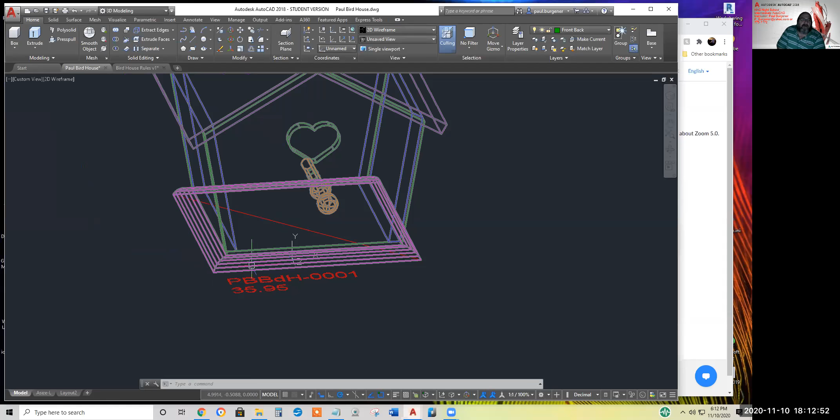I wonder if I could fillet these edges back to 0, then round the corner, and then refillet it so that the fillet goes around the round corner. Nah, let's call it good enough.

Oh, damn it, I still got that little rectangle. Always something. Lose the little 4 sides.

Insert, create block. Redefine the one with the S in it. Base point there, select objects there, click, click. Enter, OK. Yes.

Change that again. PB, BDH hyphen 0001, and the price went up again, $38.95.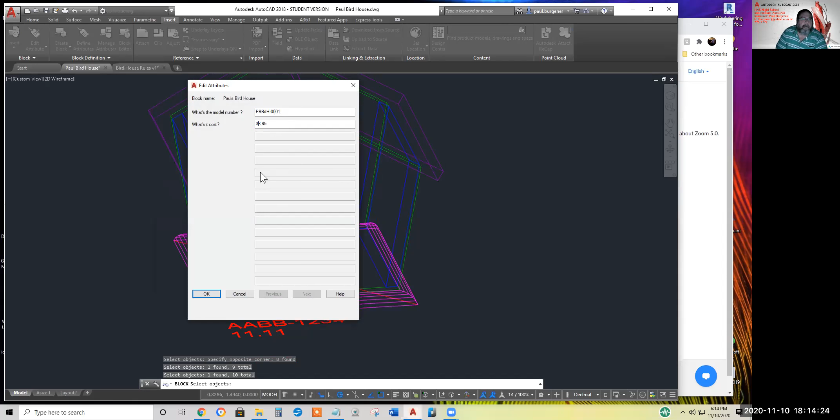Now, to get rid of that block, I don't know if I officially taught you this or not. The purge command will get rid of anything that's not used, possibly a few exceptions. I don't know that you can purge a saved view. But certainly layers, blocks, text styles. You want to get rid of blocks, specifically the Paul Birdhouse block.

And we'll leave the dimension style there, we'll leave the multi-text style, used every layer. Interesting, you can purge a visual style, but not a saved view.

Never noticed section view style, wonder when that came on. What the heck's a mine style? Oh, M-line, multi-line, yeah that was a command. It might have come out in release 13 in the late 90s, and it never got popular because editing them was unpredictable.

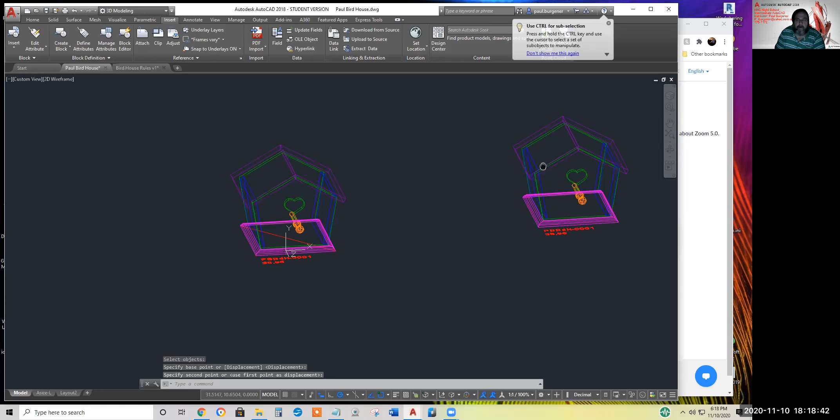Go back to model, copy for copy, bring it over here, and actually coming out. Got to be careful, you don't want to put the copy where it'll show up, yeah see it's showing up there. So let me move it a bit further. Explode it, X for explode.

I believe before I sliced, let me freeze the roof layer to get it out of the way. I'm having trouble selecting this. Oh wait, I need to use the press pull command. It doesn't want to select the blue surface because the roof surface is blocking it. So let's freeze the roof layer. There, freeze. Okay, before I sliced it, I press pulled, I believe, both sides.

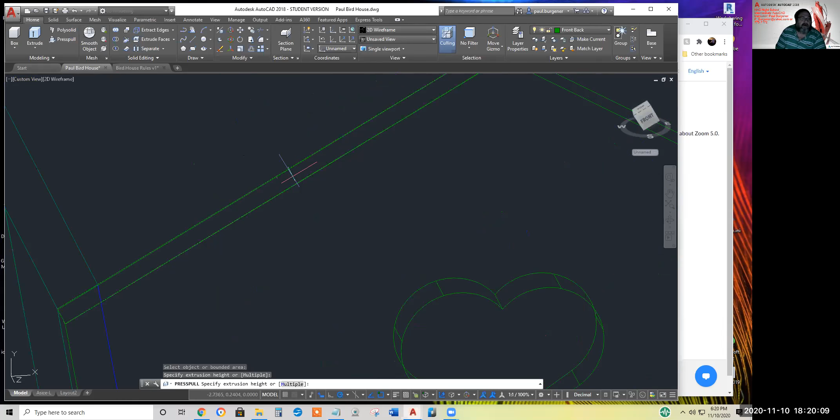Wouldn't you know, it's wanting to press pull at the weird angle. But Damien, if you can imagine, while it was still a simple box, well, let me do it on the front here. Press pull. Ah okay, so that gave me some scrap to cut off.

Actually no, maybe when I started with the original rectangle, did I grip edit the middle of the top of the rectangle and pull it straight up? Yeah. Or extruding it? I think you gripped the middle and pulled it up. I think that's what it was. No, it's in the recording. Yes.

Gosh, I thought I fell into the twilight zone a second there. Let me put the roof back on and slice off this. Layers. Let's go to the layer properties, thaw the roof.

And again, we definitely have a fault, an interference there, where the front interferes with the starboard side roof.

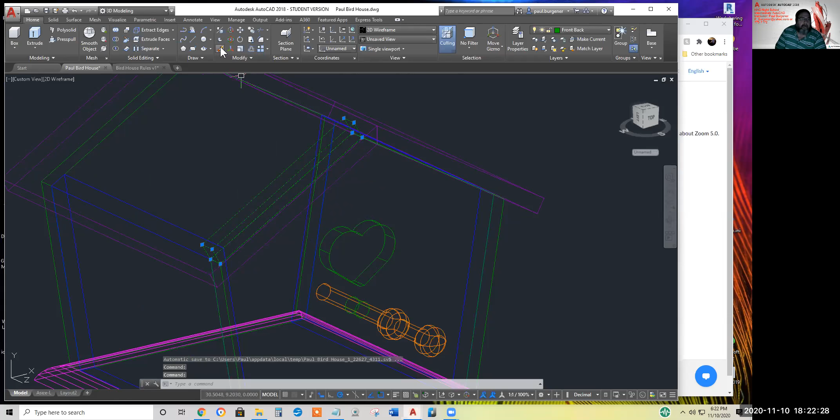As long as we're careful with our 3 points, we don't need the UCS any particular way. We'll launch the slice command, select the front board and hit enter. Launch the 3 points method. O-snap on 3 points on the bottom of the roof. Enter. And delete. Top. This thing's more frustrating than it's worth.

Okay, I think because I'm in a weird UCS, that's what's messing me up. We'll go back to the world UCS. Home, top, front. I don't believe there's any interference anymore.

Any other questions on anything?

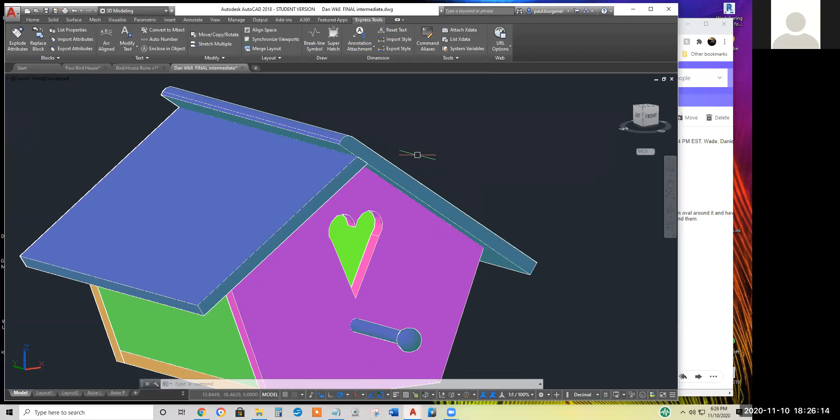Let me see, is it a block? No, it's just solids, and you might even nitpick the layers, but I didn't have the actual start model yet. I gotta merge that into the start model and do the rest of the work.

Okay, you do have a hole in the front. Let's go to visual style. Oh, you need your attributes yet.

Don't see any blatant interferences.

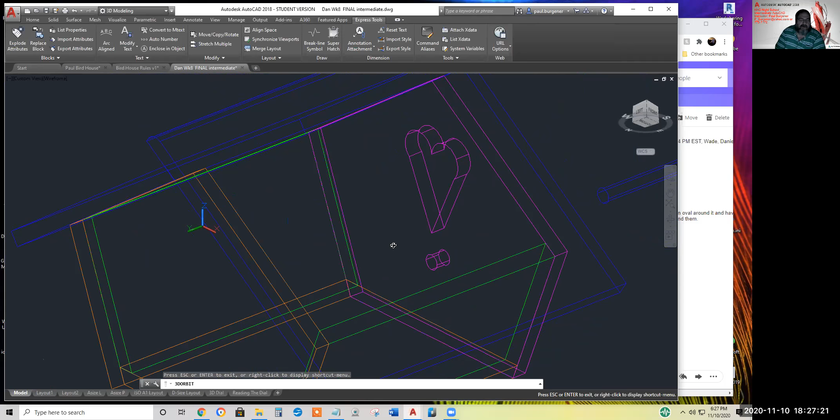Now, showing this seam right there might cost a sale or two, but we'll call it good enough.

Oh, when you got the foot pincher there. Yeah, I know, I actually had to buy some time because you were going too fast for me, and that worked out good.

Yeah, I did want the sides to go down, but then, so what I should do is pull that surface down and then trim the bottom plate off, right? Split it and pull the two sides down. I think I could do that, no problem. If you say so.

Another option might be just to build a box half inch thick, put it there and union it together. Let's see, 3D modeling box on the world coordinate system. Length is in the X, we'll make that plenty big, say 2 units. Height, we'll make 1 unit.

What happened? Well, we specified 2 dimensions. Let's see, DI for distance. This, I don't know why it keeps kicking me into dimensioning. Yeah, let me start over. Box, click. I think I forgot to click the word length. I gotta remember to put my cursor perfectly in the X direction. Let me turn off something here, the dynamic input.

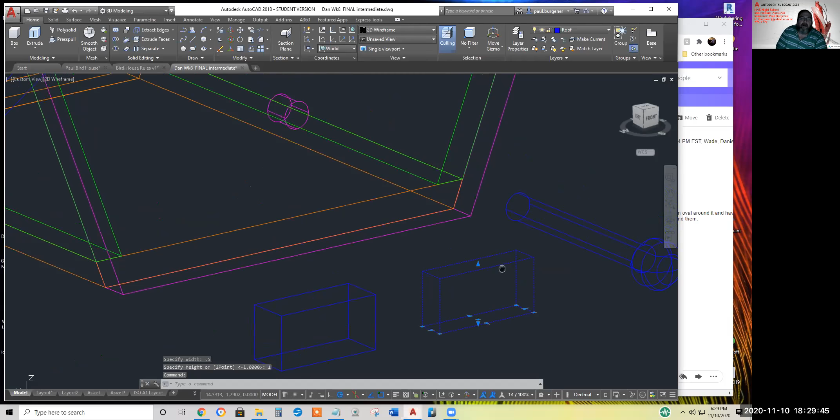To be on the safe side, I'm going to put it on the front back layer. I think they fixed it, but there used to be a time when if you union stuff on different layers, the surface would keep the color of the object it used to be. You with me? So rather than taking time to experiment, I'll just move it to the front back layer.

Okay, you started your, you didn't use the starter file. That's fine, yeah. Like I said, I got to merge that still because I didn't have the time to download it and put it onto the company computer.

All right, let's see what layer. You got it on the exercise 6 layer. Actually, match properties might work. Let's see, drop down. Now, M for move.

Now, can I move this perfectly vertical? Union the two together. There we go. Got a bit of a space there for the bird to hop up.

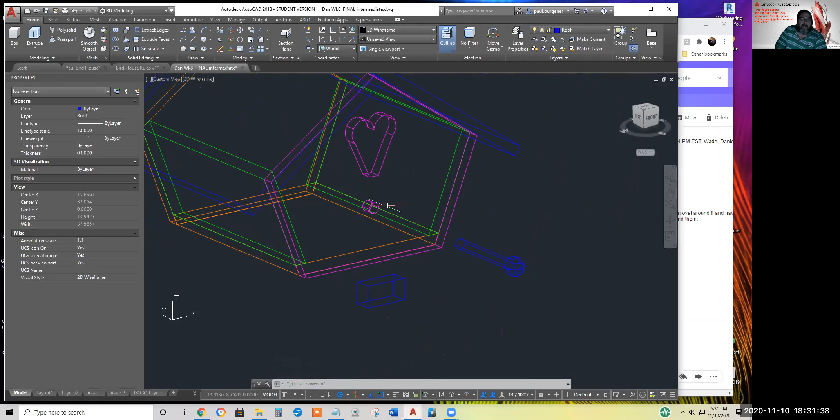How did I move the hole? Was I successful in moving the hole with? I think it was here. I've already forgotten what I did. Retirement can't come too soon for me. I think it's offset.

Well, I think I just offset it right into the opening. Let's try that again. Offset faces, select the hole, hit enter. Specify the offset distance, well, let's type 0.5, see what happens.

Interesting. Well, if we wanted to, you know, I won't take time, but consider taking another block, unioning it to fill up the hole, and then simply remake a cylinder, or actually you could copy the perch on top of itself and use one as the sacrificial cylinder to burn a hole through.

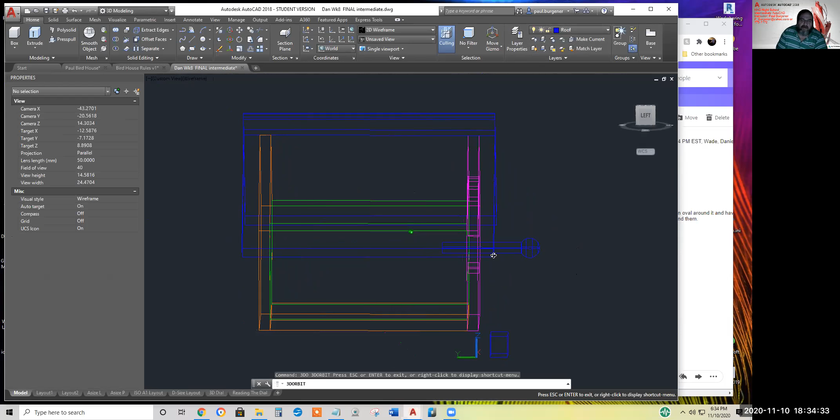Okay, 3DORBIT, since I lost my, there, the perch goes inside. And I see no harm in having it go inside far.

Now this is on a different layer. We'll see if that thin film in blue still lasts. I don't think it's a problem anymore.

Subtract, select the large object, enter, subtract just one, probably the newer of the two, enter. So there, it left the old one.

Now you gotta, I thought there's a command where you can reduce the diameter of a hole. Anyway, good thing is the inside of the hole is the same color as the front board, not the blue of the perch, like I feared.

Let me draw a line half inch this way, 0.5. And I think I can slice this down to make a sacrificial block.

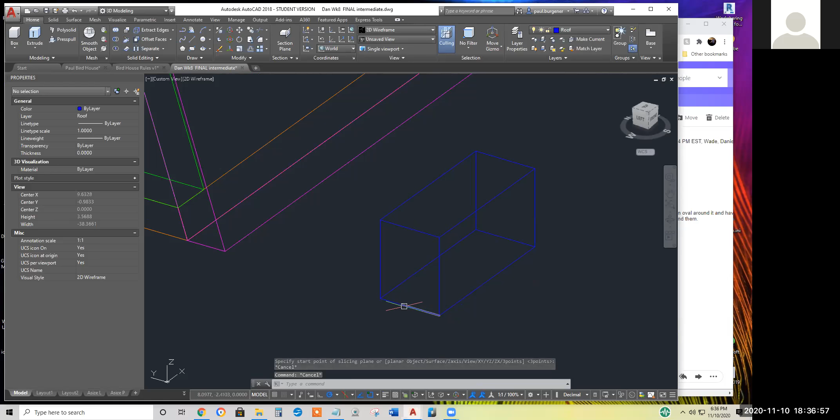Must have forgotten the, okay, there's my half inch unit. Yeah, tonight while the recording is compiling or doing its thing, I'll send the starter file to everybody.

So slice, select the box, enter. 1, straight up the Z and straight out the X, enter.

I believe I can take this guy and put him, superimpose him on the bottom of the board and carefully slide him up so it envelopes the hole that I was unable to move.

And where are we? Union. Okay, I want to union that and that. There it goes. So Dan, what's that little speck there?

I don't know if I did that or it's a remnant of yours, Dan. Still got the two attributes yet, still got the title block. Dan, you think you can - just occurred to me, you ain't got no title block. Or do you? Is that in the starter file? Yes, so you're gonna email that out, because I don't have it either. So once you email that out, then I can copy my solids over to that model, right?

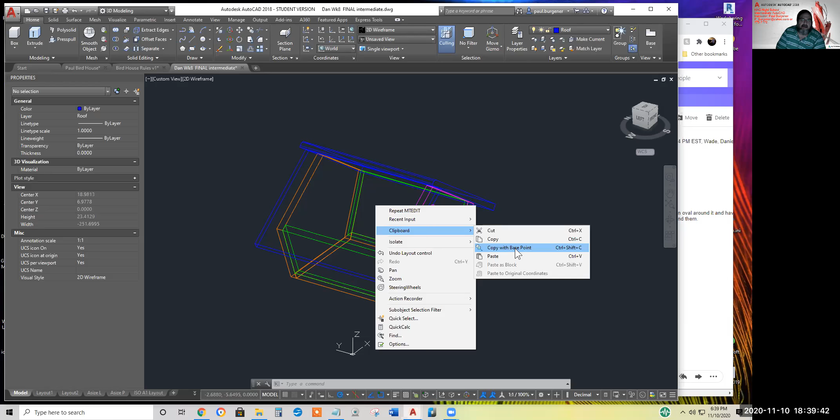The email you sent out, does it say week 8, week 9, week 7? What's the title of it? Do you remember? Stand by. Let's see, AutoCAD class. Where are we? Tom Bauer wants us to do the review on November 5th. Last one.

Oh, that's okay, you switched the email for me. You're sending my email to the other account, which is my iCloud account. I'm getting messed up here. Last one, okay, I got time, go ahead, I'm sorry. I'm looking in my other account. Most of this class I was going through the Gmail account, and then you switched it for me because I asked you, and so now I'm looking at that account.

Sally, he sent you something, AutoCAD Final Class Tuesday, but that's not the starter file. I have the instructions from week 7, birdhouse. No starter. Let me find an old message, I'll send it to y'all right now.

I got an email that says week number 8 handouts, but there's no attachment in there. There's a link to the video, the YouTube video. And script animation parametrics, that's what I have, and that was November 3rd. Yeah, that's what I have. Okay, so you have the same thing.

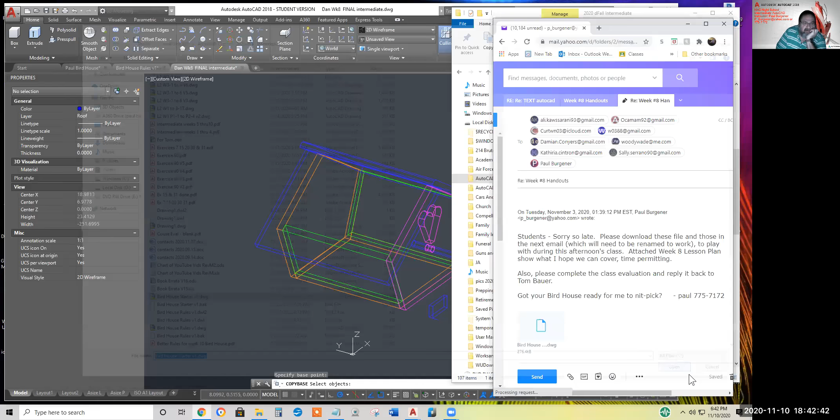Okay, birdhouse files. And put the word AutoCAD in the subject, just in case it accidentally goes to your shipyard email again. Here's the rules and the starter file. It's away.

All right, we got about 90 seconds. Any other weak spots, anybody? You're comfortable with jockeying the UCS around? We use press pull, yeah I got to learn that. The UCS, now I'm comfortable with using it after using it tonight and seeing you do it. I understand the principles for the X - you basically have to select the line, sort of like a point, but in the direction that you want the X to be going in.

Correct, yeah, you specify the origin, the direction, a point in the direction of X. And the third point can be any point on the XY plane. It's kind of intuitive to specify a point in the Y direction, but any point on the XY plane is just as good.